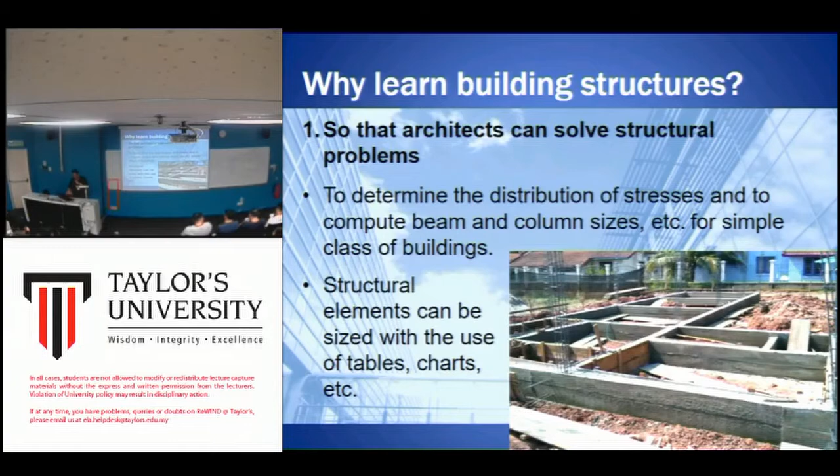And then secondly, so that the architect can talk more intelligently to their engineering consultant, so that you don't appear like, if women, maybe like a dumb blonde or something, right? So you go on site and you know nothing about construction, and the engineer says this, the contractor says this, and you cannot really get what they're talking about, especially when it comes to structure. So when they mention vocabulary related to structure, for example shear, deflection, maybe they would say, oh, there's a deflection on the beam on the first floor. Okay, so you know what deflection means.

Okay, and then the third, which is the most important reason why you learn building structure, is so that with a good understanding of building structures, you would be able to design rational and beautiful buildings. Because you understand, right? You understand if you put the column like this, whether the building would collapse or not. So when you understand how the structural components work, you can play around with the design. For example, maybe you want to put the column at a certain angle, whether you can do that or not.

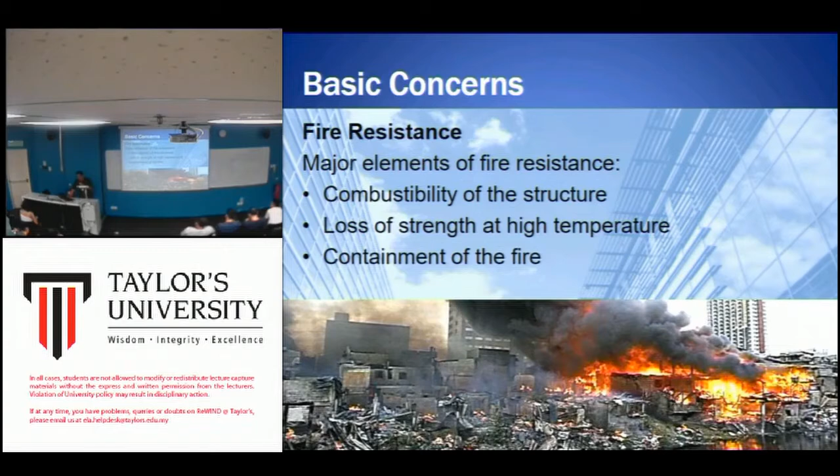So another concern is the structure system that you use for your design should be able to sustain loads. If you ask me, I would say this is the most important thing to be considered in structural design. It should be able to sustain load for that particular space that you're designing. For example, I mentioned that a building should have some margin of structural capacity beyond what is required of the actual task.

For example, this room is designed to cater for, let's say, 100 students, 100 pax. But if, let's say, especially the structural engineer, when they do the calculation, they specify the load that should be able to be taken by the structure of this space here is ngam-ngam for 100 students, for 100 people. But as you know, each one of us would have different weight. Some maybe just 50 kg, some 70, some 80, some 90.

Maybe at average, let's say lah 75. Is it logical? Logical, 75. So 75 times 100 people, then that's the load that you cater for. So if the designer just considers that kind of load when they design the structure, then if one day a group of tourists, visitors, maybe from Fiji Island, come here, all weighing about 100 kg or more, but there are still 100 of them, 100 times 100, whereas just now it's 75 kg times 100.

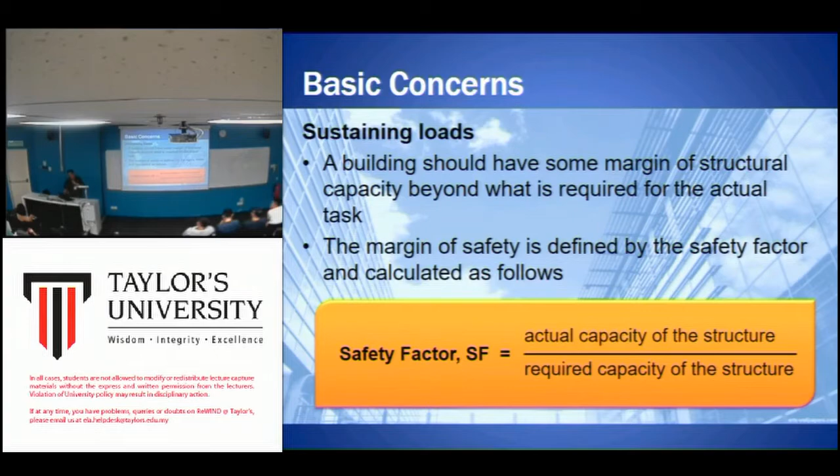Safety factor SF equals actual capacity of the structure, meaning what has been designed for that building, divided by required capacity of the structure. So usually the required capacity is lower than the actual. For example, if a structure is required to carry 20,000 kilograms and is actually able to carry 35,000 kilograms before collapsing, the safety factor is expressed as SF equals 35,000 divided by 20,000, so the bigger number divided by the smaller number, equals 1.75. So we call the safety factor 1.75.

Building structures are generally designed with an average safety factor of about 2, meaning that if this is 20,000, the actual load that it can carry is basically 40,000. Basically there's no specific number for this safety factor, so we cannot say which factor is the best. Of course, the higher the safety factor, the stronger the building would be, but then it would incur more costs, because you need to use more, let's say, steel bar to construct the floor. So I think it's best if we just stick to about 1.75 or 2.

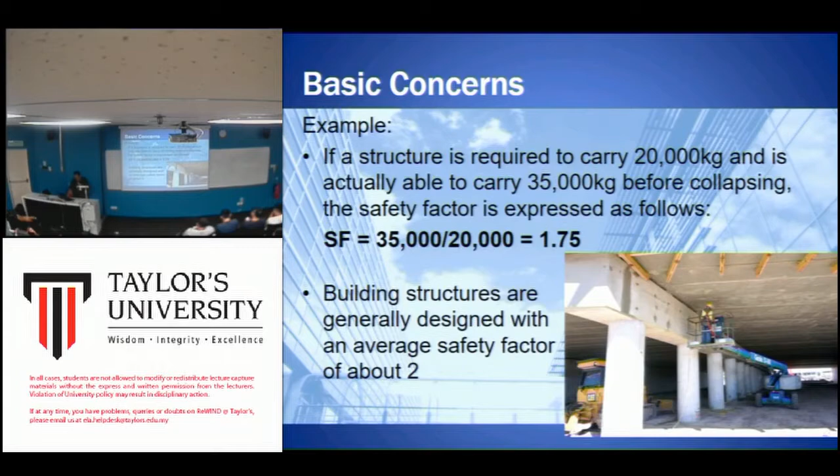Other concerns of structural design apart from safety. Just now, safety includes fire resistance and sustaining loads. Other concerns are feasibility, economy, optimization, and also integration. So when we talk about feasibility, normally the building that we construct, the structure must use materials and products which are available and can be handled by the production organization.

So most of the time, especially when we talk about sustainable construction, one of the ideas behind sustainable construction is the material is sourced from the site itself. So if you are building something in a forest or rural area, you get the material, the timber, from around that site. You don't, let's say your site is in Kedah, source the material from Johor. So that's not feasible.

So that's one thing. So when it comes to structural design, also it should be the same. The structural materials, the structural system that you plan to use for your design should be available locally, right? So I give you an example. Actually nowadays you can do anything, right? You can do any kind of construction. The technology is available, right? But the problem is the technology is not available locally.

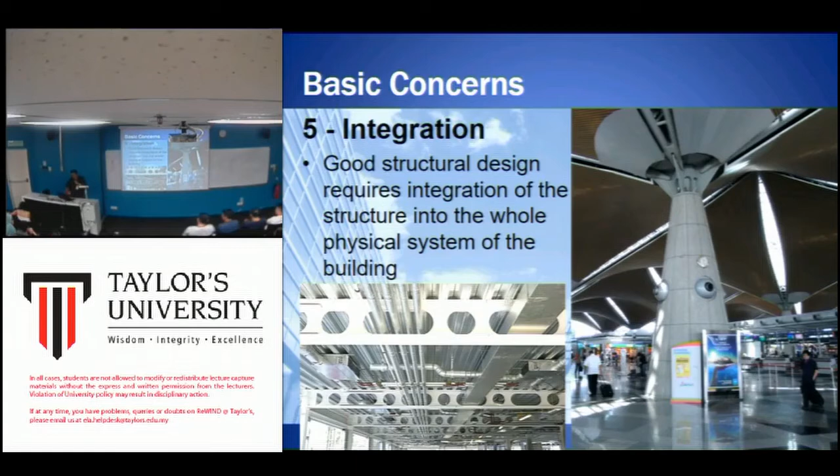Okay, now building construction revision. You learned BCon 2 last semester. I think some of the seniors learned it much longer before. They've forgotten already. Okay, when you talk about structure, basically there are two things: primary classification and types of structure. The primary classification will be in terms of geometry and rigidity, and then the types of structure that you have learned are solid, mass, skeletal or frame, surface, shell, and so on. Okay, so nothing to worry about.

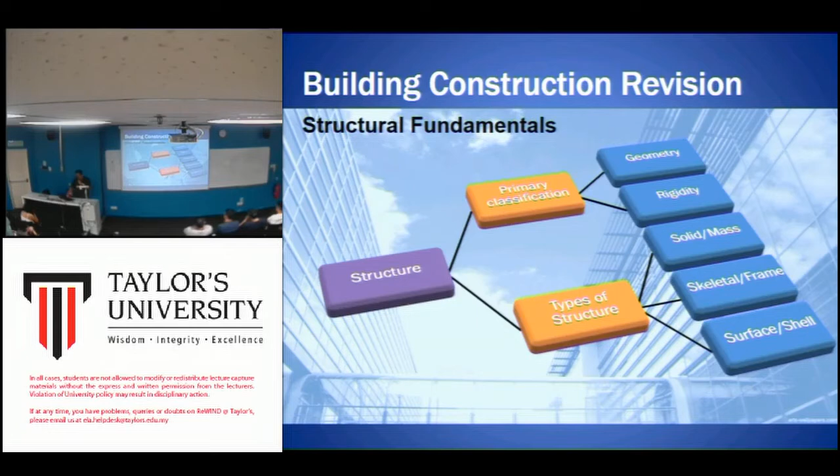Okay, so now I want to ask you, since a lot of you have fallen asleep, maybe I want to play just like last week. You have to call your friend's name. Okay, what is the definition of forces? Who wants to start first? I don't have a dice now, so maybe I can throw to someone. What's the definition of force? Anyone?

Devon, Devon. What is force? What do you think force is? Doesn't have to be accurate, but based on what you understand. If Mr. Rizal were here, he would be very upset because you forgot already what he taught in class. Energy. Some kind of energy. You want to call your friend to help?

Nikki. Nikki. Yeah. Is it Nikki? Huh? Nicholas. Wow. I was shocked. Nikki, like a girl's name, right? Nikki.

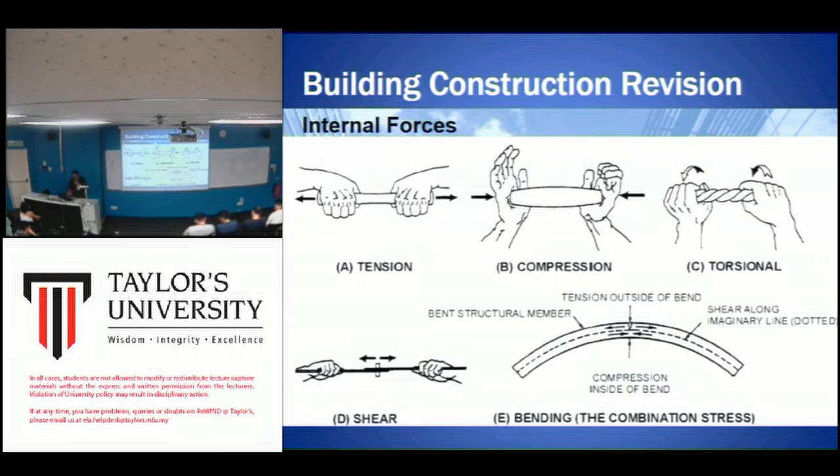Then loads. Load can be divided into static or dead load and dynamic load, which we call live load. Under dynamic load, we have lateral load. Under dead load, we have point load and uniformly distributed load. Can you give an example of dead load?

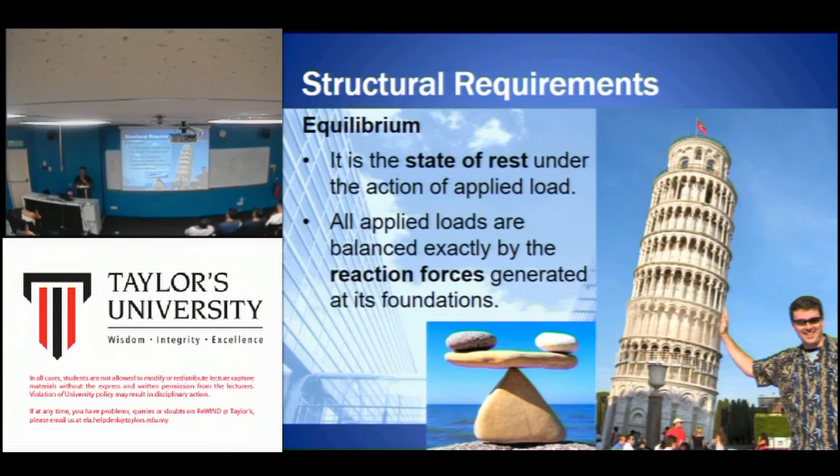Stability. As I mentioned just now, don't get confused between equilibrium and stability, because as the image showed, the pebbles' arrangement is not stable, but it's in equilibrium. In this case, stability is the property which preserves the geometry of a structure. So when you put some force like this, the structure is like that. Just a column and beam.

Under normal circumstances, it's like that. But if you put some additional forces and it loses its geometry, then it is not stable. So we say that the structure is stable if, when you put additional load on top or from the side, it still maintains its geometry, its shape.

So it doesn't change, it doesn't collapse. It still maintained. Then we can say that the structure is stable. Okay. So it is possible for a structure to fall due to its being geometrically unstable, even if it has sufficient strength and rigidity. Okay. So it relates to stability, relates to strength.

Even though your structure, the material that you use for the structure is strong, for example, you use concrete, you use steel structure, but because the arrangement of the geometry is not stable, if you put additional load, then it will still collapse. It is still not stable, even though the material is strong. So the structure can be strong, but not necessarily stable.

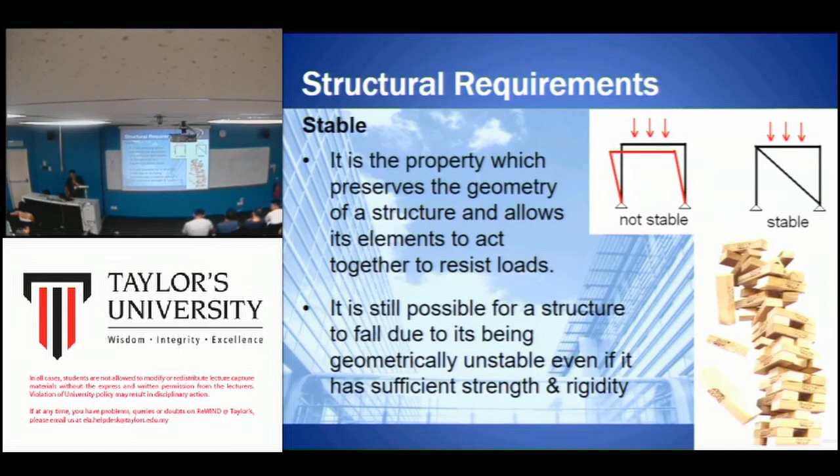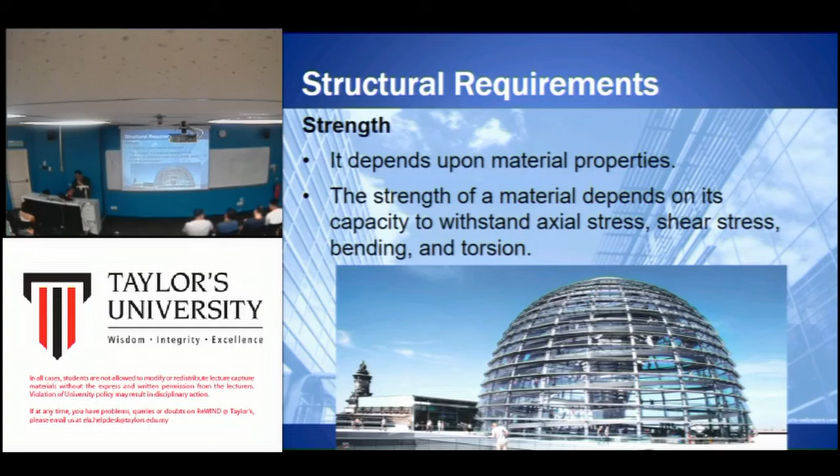Okay, strength obviously depends upon the material properties. For example, of course steel is stronger. When we talk about strength, meaning that it is strong. Steel is much stronger than timber, concrete is much stronger than timber. You're talking about the property of the material itself. The strength of material depends on its capacity to withstand axial stress, shear stress, bending, and torsion. That we will cover in the next lecture.

Okay, rigidity is a property that makes a structure not bend or flex under an applied force. It is something like stability just now, but stability refers to the overall structure of the building. Rigidity is more towards the component itself, the arrangement of material within the components. So if we arrange the material, for example, you use trusses, a truss structural system.

If you use a truss system, there are certain ways of arranging the components, right? Certain arrangements will have more rigidity compared to others. So it refers to the material of the structural system. Some structures are formed by collections of objects that are rigid bodies with pairs of objects connected by flexible hinges.

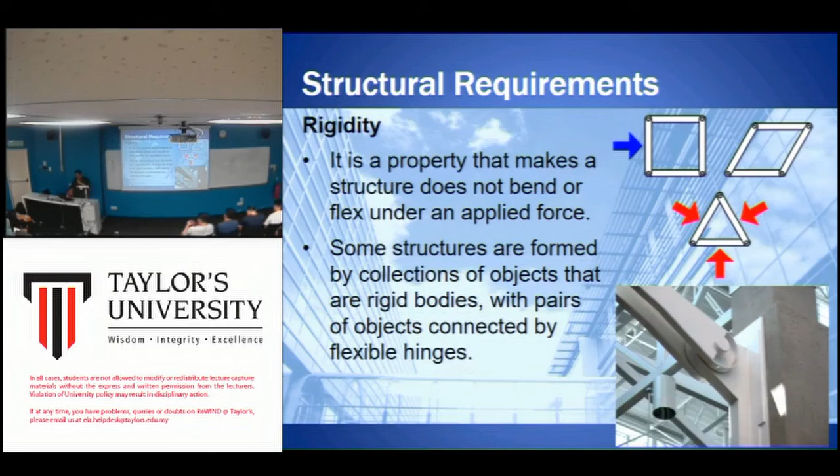Okay, structural failures. Structures fail due to the following. First is stability failures, which relate to the overall structural system. If your structure is not stable, then it would fail. So normally building structures, and infrastructure like roads and so on, when we design that kind of structure, originally it is stable, but what makes it fail is that it loses stability.

I think probably in this case it might be because of an earthquake, right? Because the force of the earthquake is too much for the structure to sustain. That's why it fails by stability. It's not because the engineer miscalculated the column size and whatnot. Normally it's because of the earthquake and so on.

And then strength failures relate to the strength of the individual structural members. In this case, timber. As you know, certain materials over the years, if they're too old, just like people, when we become old we lose our strength, right? We cannot walk, we have to use a tongkat, a walking stick. Similarly with structural materials. Over the years, especially timber, even steel, it would corrode and so on. So it would lose its strength.

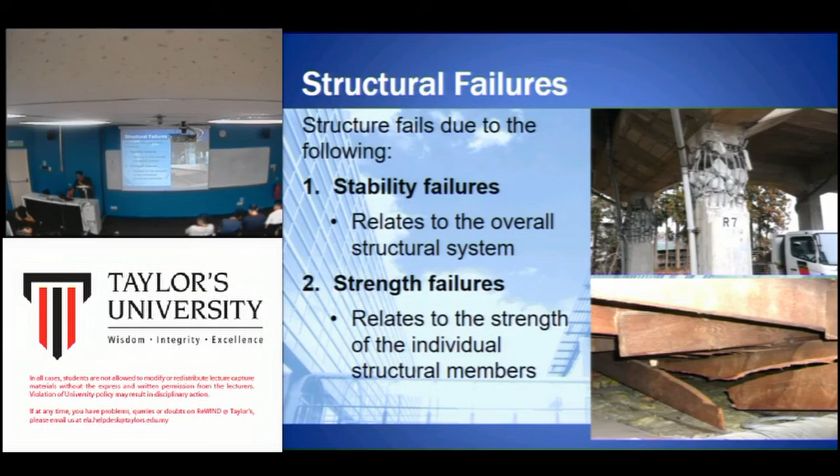Actually, there's a video, but because we only have 10 minutes, I need to rush a bit. You can watch this video later; I put it in Teams. Basically, there are 6 different cases relating to construction failures, different kinds of failures. Some fail due to strength, some due to stability. I put it in Teams, so you can watch the video.

All right, structural members. Generally there are 2 types of structural members: horizontal members like floors, roofs, beams and girders, and vertical members like columns and load bearing walls.

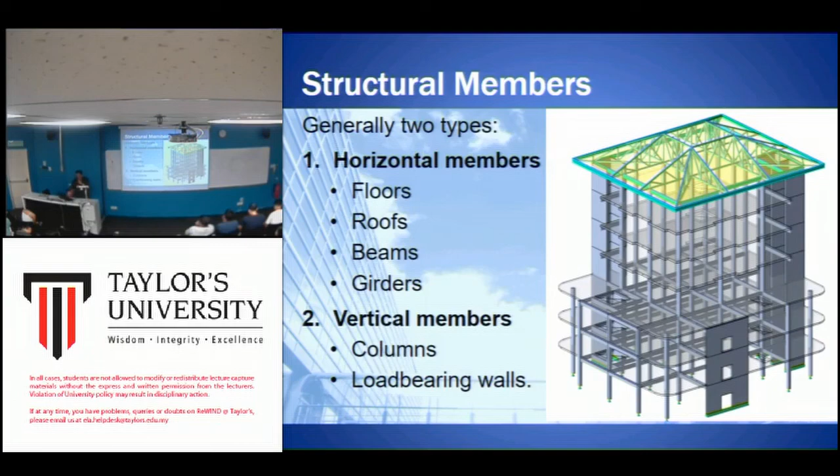And then load path, basically how the load travels inside the building. The path that load travels through a structural system is basically something like that. You can see the arrows. First from the roof. Let's say there's a mechanical system, a services system, included inside the roof. Then the weight of that component should be considered as well.

So the load from the roof is transferred to the beam. And then from the beam, from the middle, it distributes evenly. One goes to this side, to this column, and this side goes to this column. And then as it goes down, it adds the load from this slab. The slab obviously carries live load and dead load. The load will be transferred to this column, so it would add to the loads already from the roof.

And then here it goes to this column, adding to the load on the column. Plus this level, plus this level, then it would be transferred to the ground. Normally in construction you would have the same size of column from ground to the roof, but because the amount of load that the column supports is different between levels, you can have a bigger column at the lower level and a smaller column on the upper level.

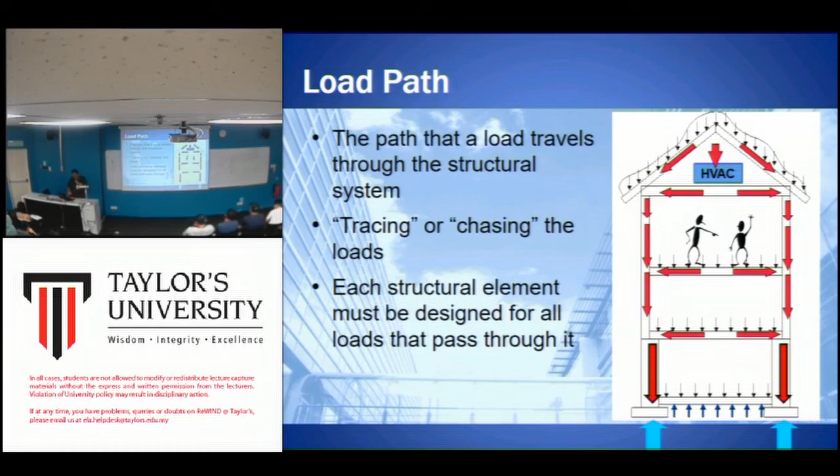But of course, when you construct a column, you use formwork. So maybe it's more economical if you use columns of the same size because you just use the same formwork. Every load applied to the building will travel through the structural system until it is transferred to the supporting soil. For a truss system, especially for the roof, from the top it is transferred to all the components of the roof truss and then to the column.

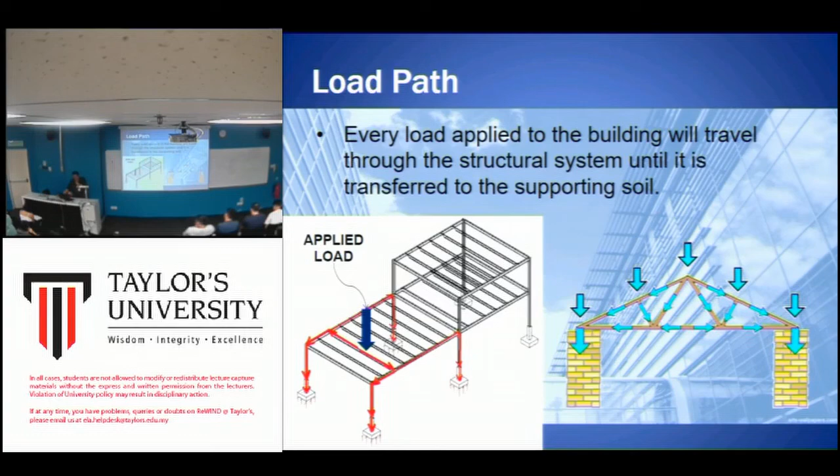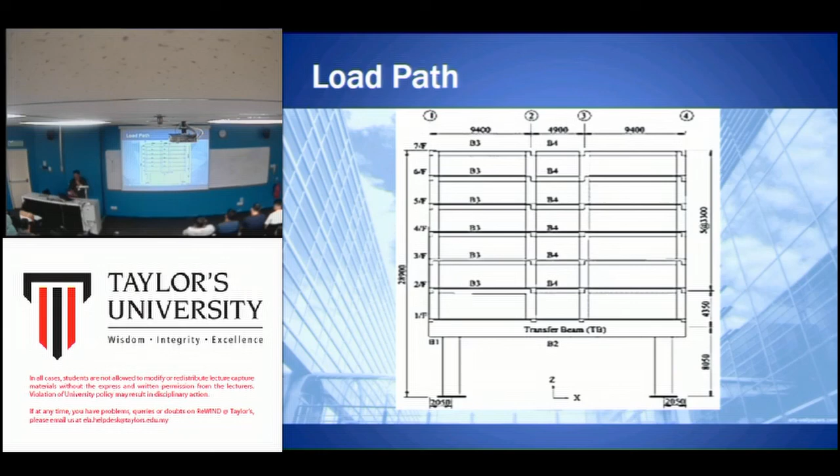So this is the one that I mentioned. In some cases it is more economical to have columns from ground to the roof. But if you need to do this kind of construction, it is actually possible. On the upper levels you have 4 columns, but on the ground floor you have only 2 columns. So all the columns from the upper level are transferred to this transfer beam. Whether it is economical, that's a different story, but it's possible.

When the column sits on the beam like this, then it becomes a point load. One example of point load is the column sitting on this beam. So in this beam there are 1, 2, 3, 4 point loads, because the load is not transferred directly to the ground.

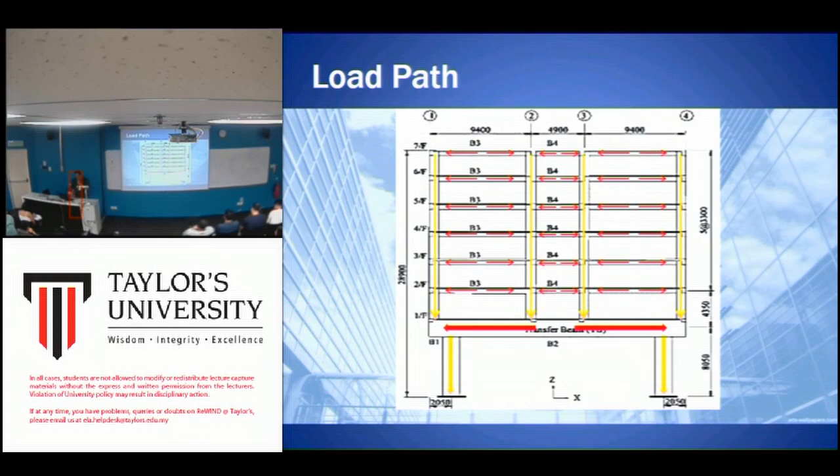This is from a different angle. You can see how the load is transferred from the slab. If you have many beams here, from this beam it is transferred to this column, from this beam to this column. From each beam it goes to the nearest column, then it is transferred to the ground.